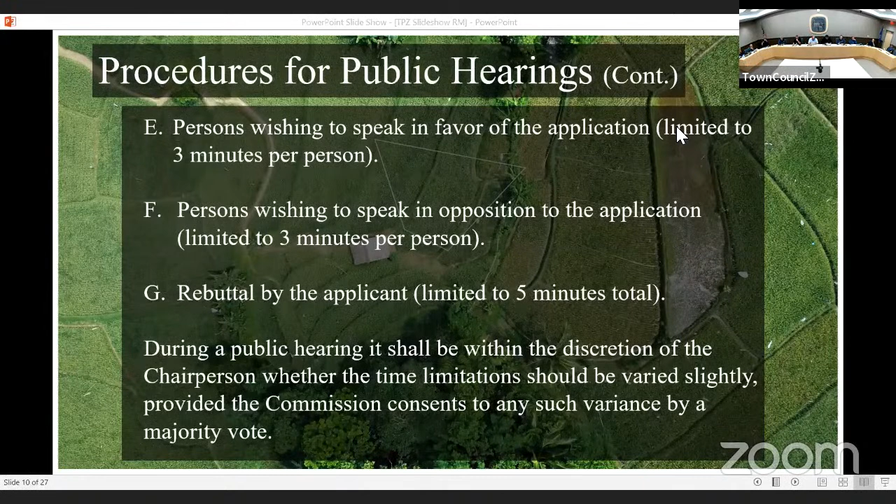Okay, thank you very much. Commissioners, I'd entertain somebody to close this petition 24-22 and move it to old business. So moved. Motion made by Commissioner Havens. Do I have a second? Second, seconded by Commissioner Haggerty. Any comments? Any discussion? All those in favor? Aye. Opposed? Motion carries unanimously to close petition 24-22 and move to old business.

Commissioner Lenars, could you read our next petition, petition 28-22, please? Petition 28-22, special permit, section 3.23.1B, an accessory outside use to allow a tent event for fireworks sales at 95 Fenn Road. Applicant Keystone Novelty Distributors LLC, owner 95 Fenn Road LLC, contact Alex Mutzabaugh, continued from June 8th, 2022.

Once again, we had most of the presentation last meeting. Everything was pretty straightforward on this. I don't think there's anything new. The abutters have been notified and the applicant has satisfied our comments. There were some comments that at the time were outstanding with regards to revising plans to show certain distances around the tent. We also recommended certain conditions with regards to placement of the tent and a 20-foot radius around it. And then there was a comment that needed to be addressed by the fire marshal with regards to distance to the generator.

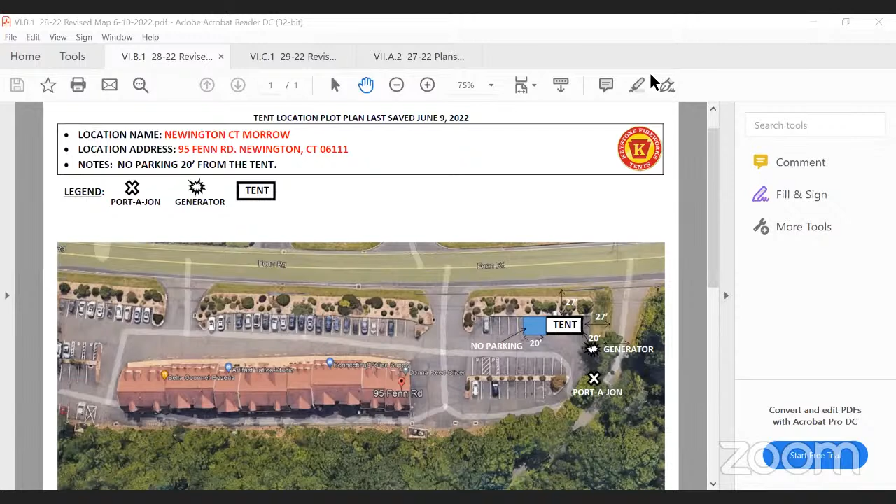Just thought I'd double check with you to see if you want to add anything, or are you all set? No, I think we're good. It's pretty straightforward. We updated the map, like Renata had mentioned, and I believe that everything is in compliance. We just need to have our inspection done once the tent and all the product is displayed, and then we should be good to go.

Okay, very good. At this time, we'll open it up to the public. Is there anybody either here or online wishing to speak in favor of this application? No one has their hand raised, Mr. Chairman. Anybody wishing to speak in favor? Anybody wishing to speak in opposition? Anybody wishing to speak in opposition, please come forward.

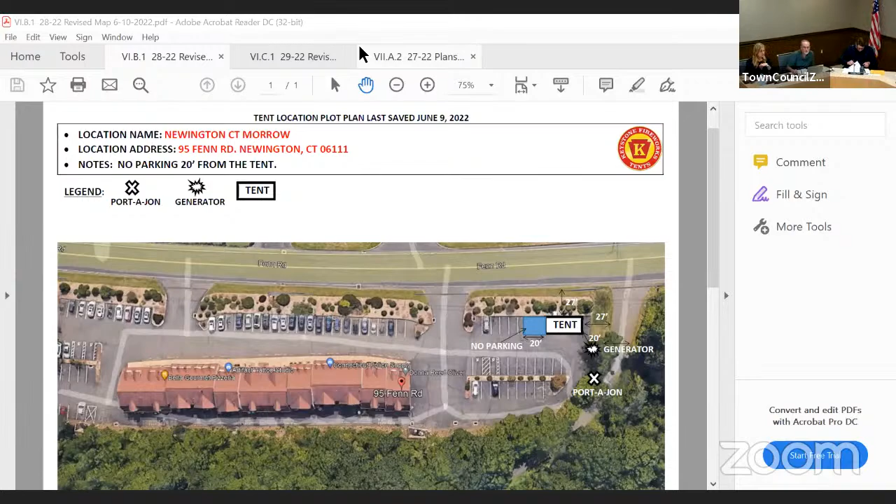Hearing none, without any objection, I'll ask for a motion to close and move to old business. So moved, Mr. Chairman. Motion made by Commissioner Woods to close and move to old business. Do I have a second? Second, seconded by Commissioner Havens. Any discussion? All those in favor? Aye. Opposed? Motion carries unanimously to move to old business.

Next public hearing on a petition is petition 29-22. If Commissioner Drodes could read that for us, I'd appreciate it. Petition 29-22, special permit, section 3.23.1.b, an accessory outside use to allow a tent event for fireworks sales at 205 Kelsey Street. Applicant Keystone Novelty Distributors LLC, owner Reno Properties II LLC, contact Alan Mutzabaugh, continued from June 8th, 2022.

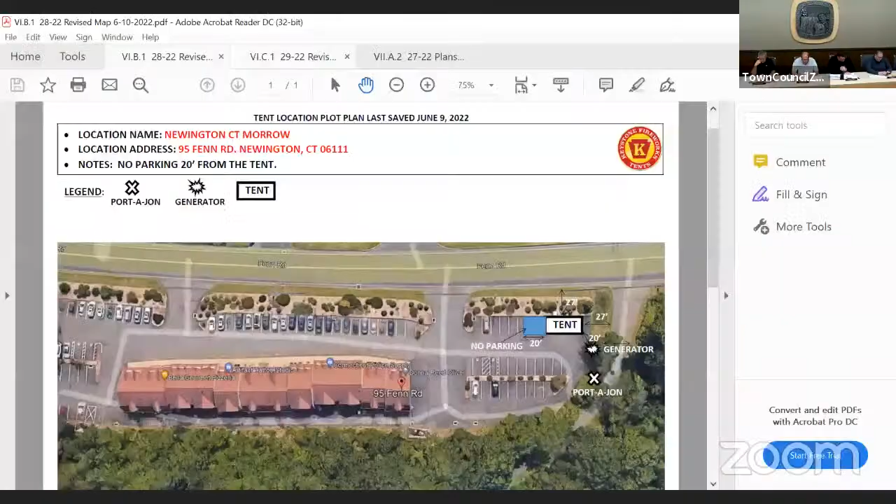Thank you very much, Commissioner. Same thing here, abutters have been notified. Renata, have they complied with everything on this location for you? Yes, this is the same situation as the previous application. The applicant complied, provided revised plans. On revised plans, they have addressed all of the staff comments to our satisfaction, and we recommend approval. Very good, any questions from the commissioners?

We'll go straight to the public. Anybody wishing to speak in favor of this application, please come forward. Anybody wishing to speak in favor of this application?

No one in the room has their hand raised. Anybody wishing to speak in opposition? Please come forward.

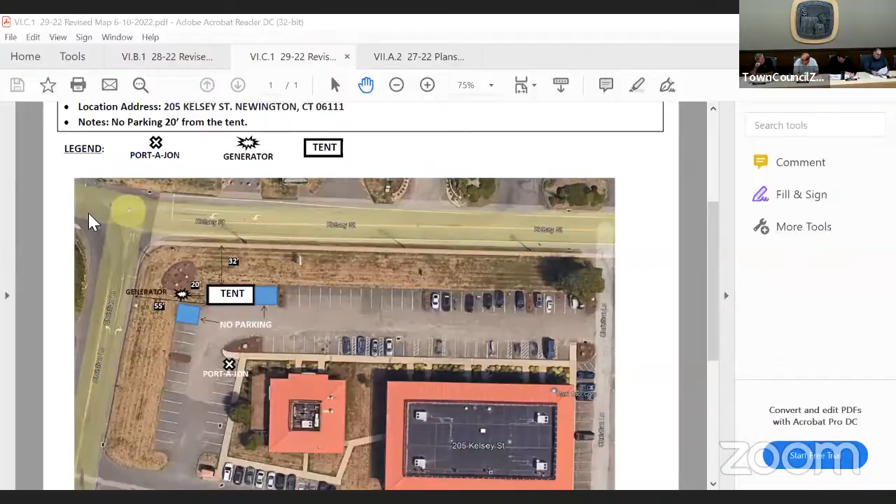Hearing none, I'll entertain a motion to close petition 29-22 and move to old business. So moved, motion made by Commissioner Havens. Do I have a second? Second, seconded by Commissioner Haggerty. Any discussion? All those in favor? Aye. Anyone opposed? Motion carries unanimously.

Okay, we're in new business. We have petition 27-22, site plan modifications of the existing parking lot, loading docks and lighting at 65 Homes Road, applicant BL Companies Incorporated, owner 65 Homes Investment Partners LLC, contact Kevin Hickson.

Is the applicant here? I know, this is interesting. You have to somehow use this microphone. Yes, I put the stand behind the table there because the camera's going to track over there.

My name is Kevin Hickson, Senior Project Manager at BL Companies, located at 355 Research Parkway, Meriden, Connecticut.

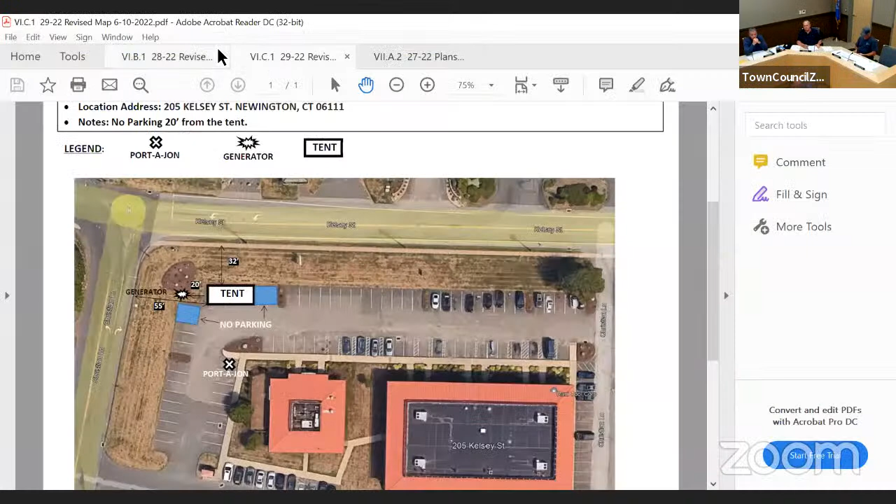This is a site parking lot modification with a 117,270 square foot warehouse building. It's actually two tenants that are in there, one being Amazon, the other used to be the Sears scratch and dent. Now I think it's the Sears generic scratch and dent tenant. It's a 9.04 acre parcel.

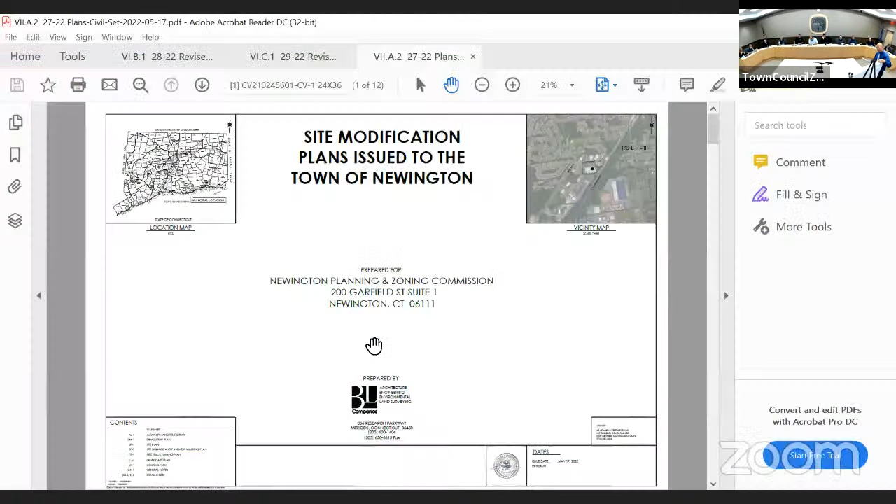We added, with the revised plan set that we sent to the town last week, a ramp and stairs. With your permission, I think we're going to display plans online, since the public needs to see what you're showing, and I think the commission has a hard time seeing at this distance.

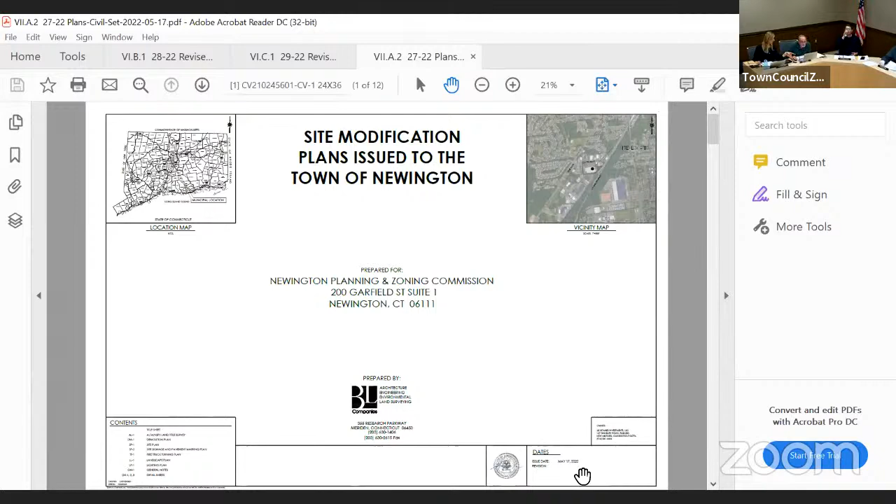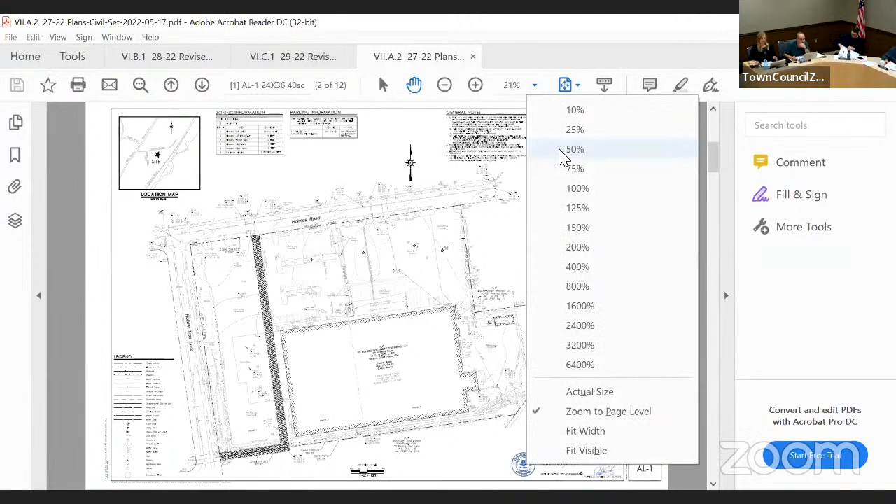The one question for you is which plans? These are not the revised ones, these are the ones dated May 17th. So we're showing the May 17th plan. You are showing the revised set of plans, right? Yes. So as we are displaying the sheet, if you want to just point out the things that are different, because the things on screen will be different than what you are showing. Correct. So if you want to go to the site plan.

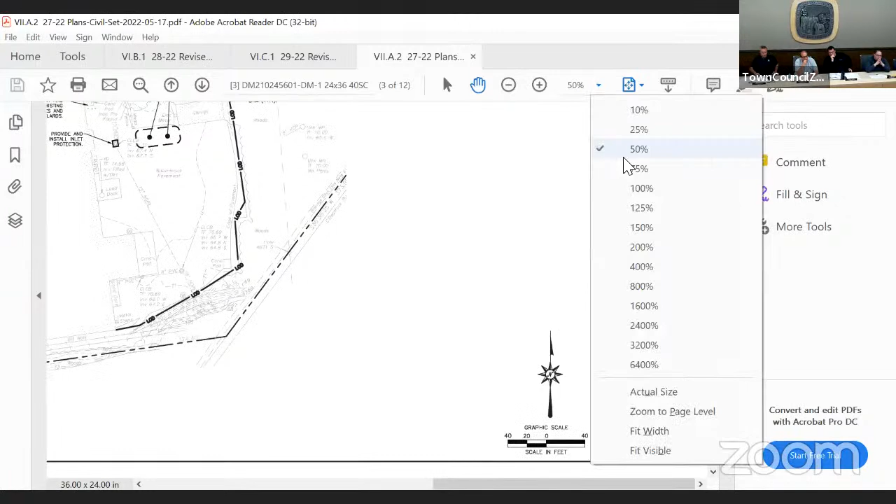Oh, this is a survey. The survey we did, I don't know if you want me to talk about it, updated the building square footage. It was 127,447, and we updated that to 117,227 square feet. There was a 10,000 square foot addition on the west end that was removed, and that just reduced the square footage overall.

On the site plan you see there, on the east side, which is on the right side, there will be associate parking spaces. The entrance to the building, to the Amazon facility, will be on the east side. The difference on the revised plans is that we've added an ADA switchback ramp that gets you up to that level, in addition to the stairs. The handicap spaces remain the same as provided.

The difference on the north side between this plan and the updated plan is the addition of concrete, heavy duty concrete pavement that would occupy the 15 loading dock doors. Then there's a rectangle just north of the loading docks heading, that's a post indicator valve. I was in contact with the deputy fire marshal, still want to get final confirmation from the fire marshal that we can remove them. Basically, they're post indicator valves for 2 fire lines that service both tenants of the building right now. So that's it with the site.

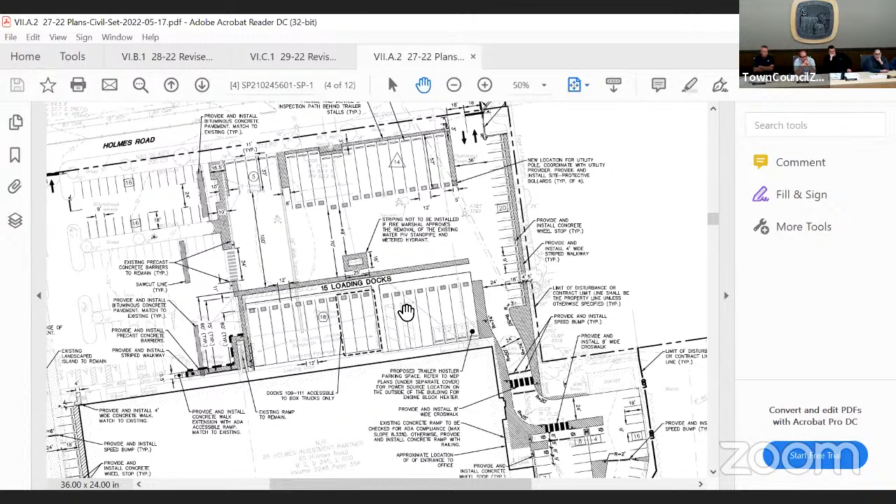I'll get final confirmation from the fire marshal. So would they still act as a shutoff? Yeah, they would. So wouldn't you still want to protect them? They're at grade instead of being up above, because they're about 3.5 feet above, and that's why they have the bollards around it. But the switch would be to a valve box that's flush with grade, like a typical one.

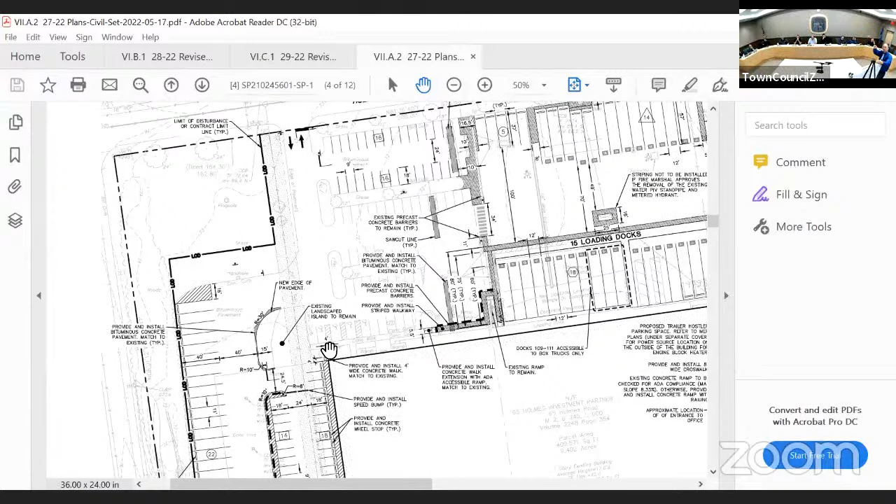On the west side of the building, there is some additional parking we're providing for regular parking spaces, and west of that area there will be box truck parking spaces located over there. Access from that parking space to the north side of the building, we've added a sidewalk, an existing sidewalk plus a proposed sidewalk. There's another entrance that's there right now, which will be a secondary entrance to the building on the north side. You can see the hand right there as you make your way east. There's a switchback ramp that gets you up to that 4-foot level.

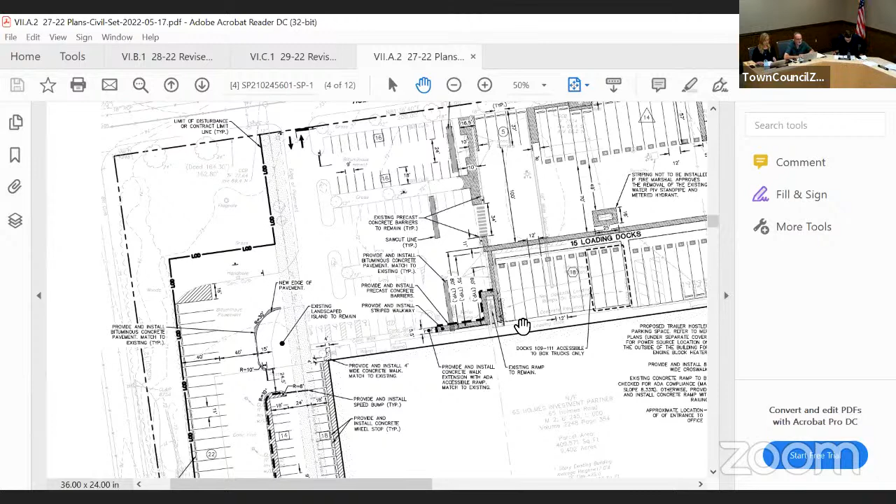Does the staff have anything to add, or have they complied with everything needed? Yes, we have one comment, which is a condition to be placed on the approval, because they're required to keep screening for loading dock doors, and there is currently screening existing on site. We will recommend certain language to ensure that screening remains. For screening the loading docks?

Yes. How are they screened now? We have a zoning regulation that requires the commission to review and approve any loading dock doors facing a public street to be screened. They currently have trees, about 10 trees that line up Holmes Road that screen these new loading dock doors they're proposing. It's going to be important going forward that they maintain that screening.

Okay, very good. Commissioner Claffey, did you have a question? I know this building pretty well, so the screening is at Holmes Road? Yes, the existing trees you see here go across the whole thing. So are we going to ask them to add more to a building that already has screening completely across the front of it on the street?

No, there is already screening, and I think we should just include language that they have to maintain that screening, but not add any more to it. They have to maintain the existing screening. We are adding actually 3 honey locust trees on there. I'm looking at that, we're not imposing to add more for a building that already exists, you're not adding any bigger building, you're just cutting 8 doors in. That's why I want to make sure we're not imposing more. They're proposing it, we did not really ask for new trees, and I don't think that we should.

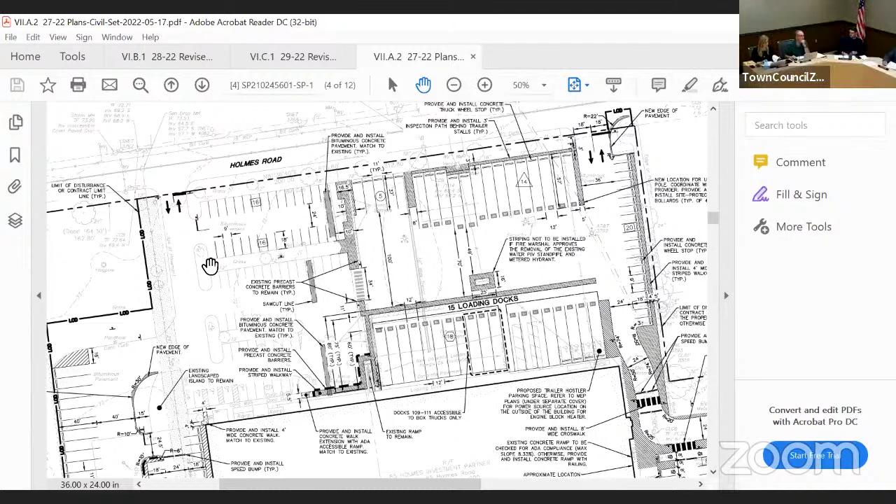Gotcha, I think it's just important to make sure these trees don't get neglected. Okay, very good. Any other comments from the commissioners? No other questions? Thank you very much.

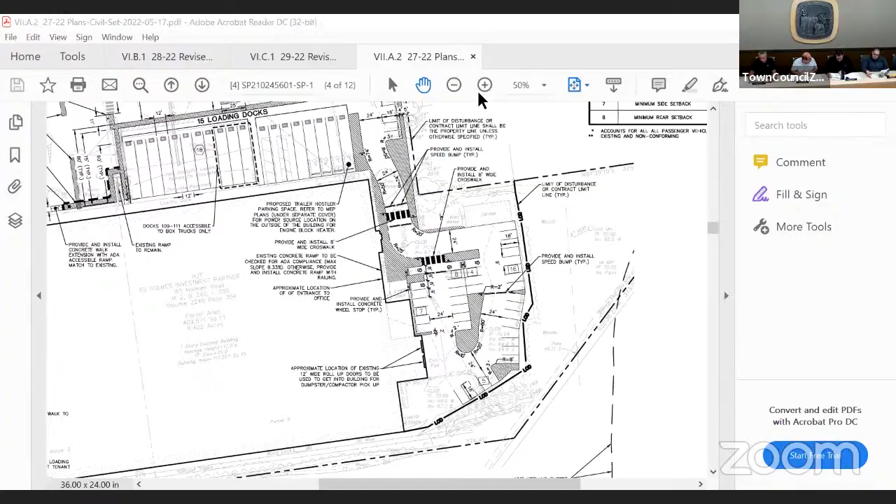Entertain a motion, well, it's already on old business. We have to move, I entertain a motion to move it to old business, Mr. Chairman. Motion made by Commissioner Woods. Do I have a second? Second by Commissioner Claffey to move this petition 27 to 22 to old business for action tonight. Any discussion? All those in favor? Aye. Opposed? Motion carries unanimously.

Next thing on the agenda is petition 30-22. Commissioner Woods, if you could read that for me, I appreciate it. Site plan modification to modify the access from Hartford Avenue at 4 Hartford Avenue. Applicant Diyala LLC, owner Diyala LLC, contact J.Y. Shallow. Is the applicant here?

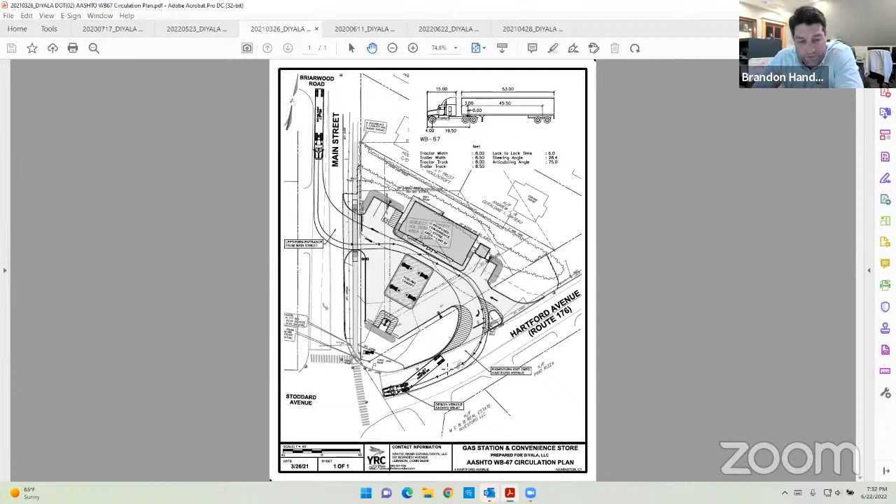So that is the reason the site plan changed in terms of the geometry of that exit lane. All of the changes were within the state's right of way, so no changes to parking or to the internal configuration of the site. I think you can see, comparing the 2020 plan and the 2022 plan, that nothing changes except for that exit lane.

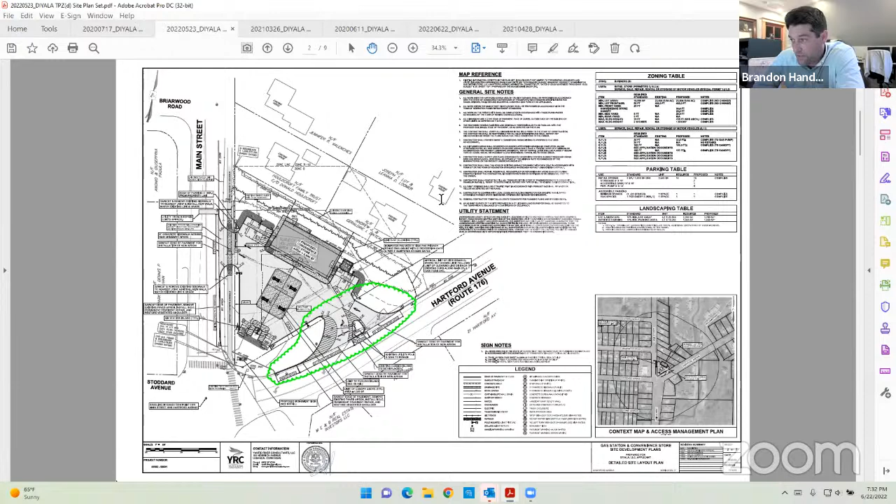Sorry, switching pages here—there we go. So that's the long story short. Happy to answer any questions you may have, but again, it's a minor change related to the DOT's comments, and they were satisfied in April of 2021 with this plan.

Very good, thank you very much. You're welcome. Any questions from the commissioners?

Any questions? Renata, anything else you'd like to add? Eric will comment on this.

This is basically driven by DOT and their purview over the state road, and the changes are minor in nature and really don't affect the on-site. It's really just the access to and from the site. I see no reason why it shouldn't be approved.

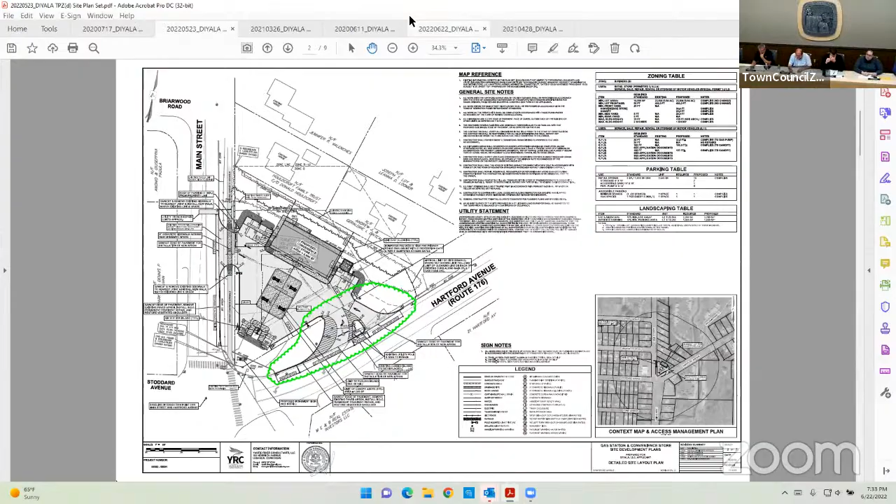Very good, thank you Eric. I'll entertain a motion to move petition 30-22 to old business. So moved, motion made by Commissioner Havens. Second by Commissioner Claffey. Any discussion? All those in favor? Aye. Opposed? Motion carries unanimously.

Our next petition is petition 33-22, special permit, section 5.3.9, site plan modifications to replace the excess parking areas with landscaping, to relocate dumpster locations and other appurtenances, and to modify the site circulation at 96 to 100 Payne Road, previously approved as a residential portion of 3333 Berlin Turnpike.

Applicant HJG-PC Newington Investor LLC, owner the Rocky River Realty Company. Contact Jamie Anderson.

Jeff Dugan with BL Companies, and with me tonight.

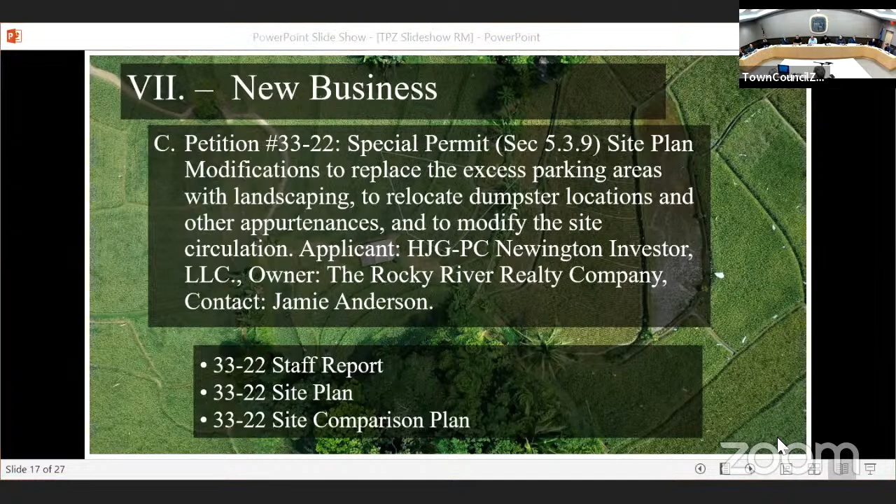We required, I believe, like 2 parking spaces for each apartment. We have since revised our parking requirements to be much lower, and it's in compliance with state statutes, and also it's much closer to what their actual needs are. So with that in mind.

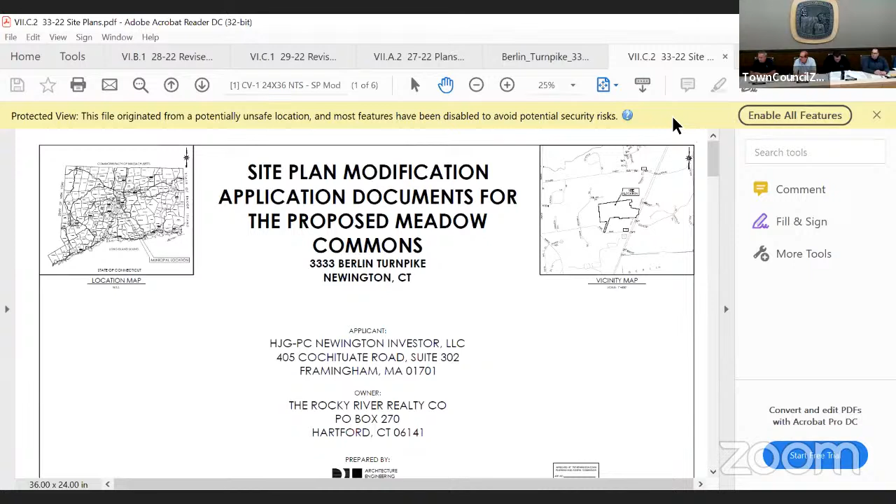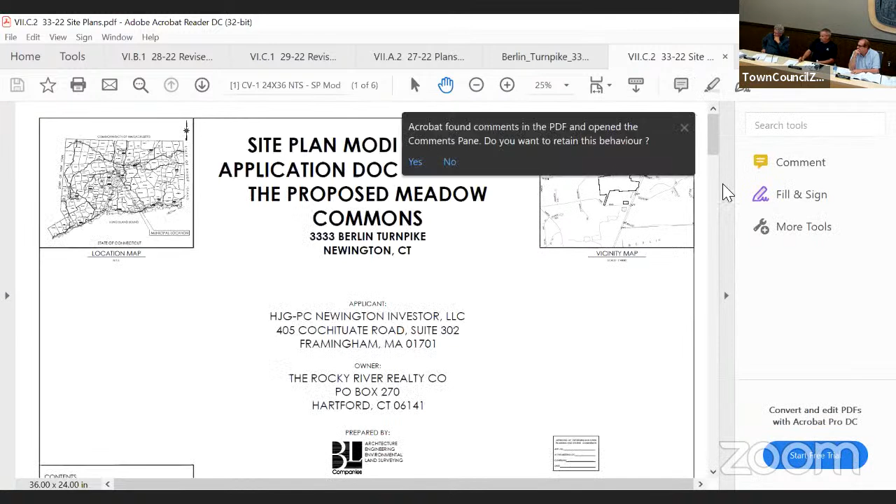Do we figure 1.6? Is that correct, or what does the state use? No, it is one space. Our regulations right now require 1 space for any 1-bedroom apartment and 2 spaces for 2 or any more than 2-bedroom units.

And you feel confident from managing your previous complexes with the proposed ratio? I have the plans that I can work with you on the proposed parking count, correct? Absolutely. If you have it up, I can certainly share the presentation, set that up. That's right, we can work without it.

I don't know why it's not working, but... Okay, it says I'm connected, but there's no internet.

That's okay, we all have plans here. I think we can manage.

Let me walk you through real quick. There's a parking table that we provided, and we'll circulate it. Do you want me to put up the comparison plan? I'll work with this.

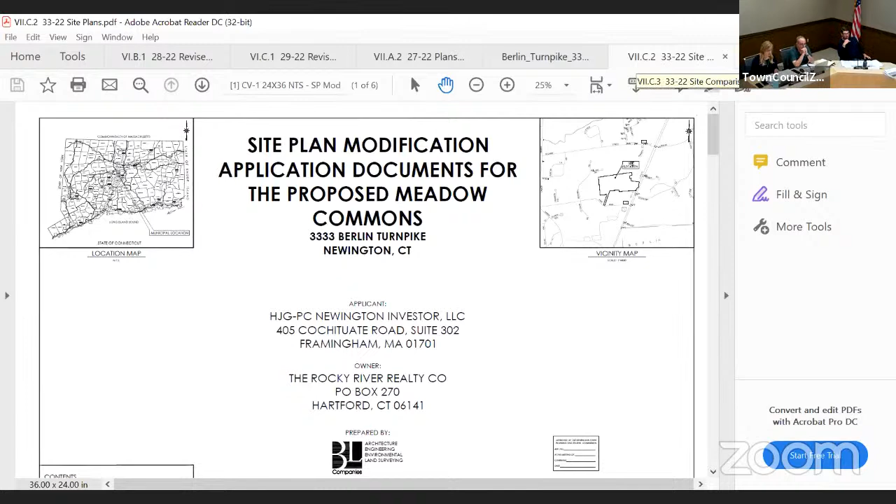That'd be fabulous. We can start there, but just to circle back to the parking question, which is really the relevant one you had asked - do we feel comfortable? Absolutely. Based on our experience, 1.5 in some urban environments we go down all the way to 0.75, but at 1.5 we have room for visitors, for staff.

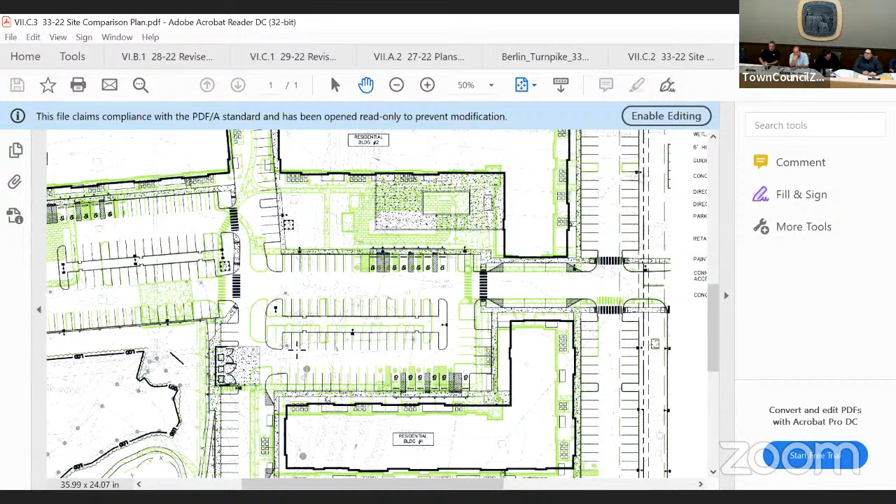And not to mention, there's a plethora of parking all around in the commercial space. Not that we feel we need it, but we didn't want to be overparked. Really the goal was to create that intimate experience. On the site plans, once we get to it, we tried to create ground floor units in some of those landscaped areas we were able to gain around the building - garden terrace patios. So if you wanted a patio space, you have an enclosed space you can sit outside and enjoy.

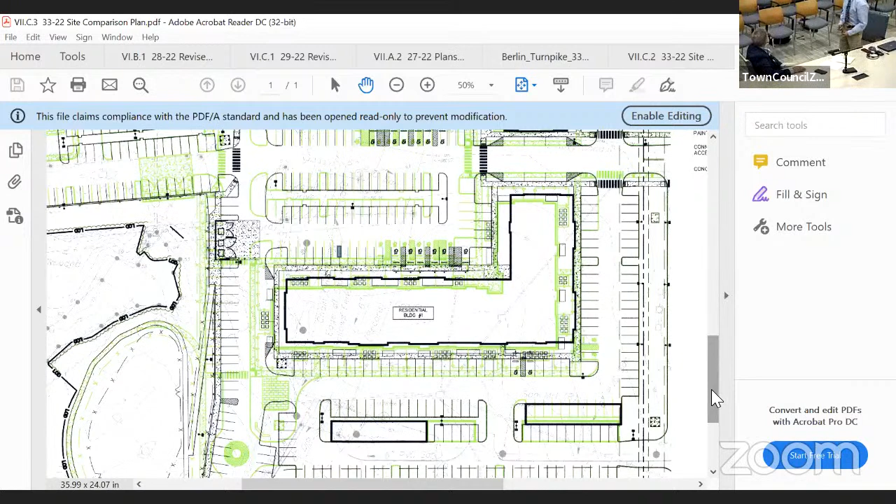So basically what we did - you can see here, and I apologize for the light green, it's kind of hard to see - the light green represents what we're proposing as part of our changes to the project. The dark black is what is approved and filed in the town land records.

Right where we're at - thank you so much, Eric, for running this for me. As you can see in the dark black, between the two residential buildings 1 and 2, before there was an access drive through there and parking, and we've been able to make that a green space and add a sidewalk. Just to the right of that, you can see we expanded the pool deck in light green compared to what was there before, and added a couple of outbuildings for the pool.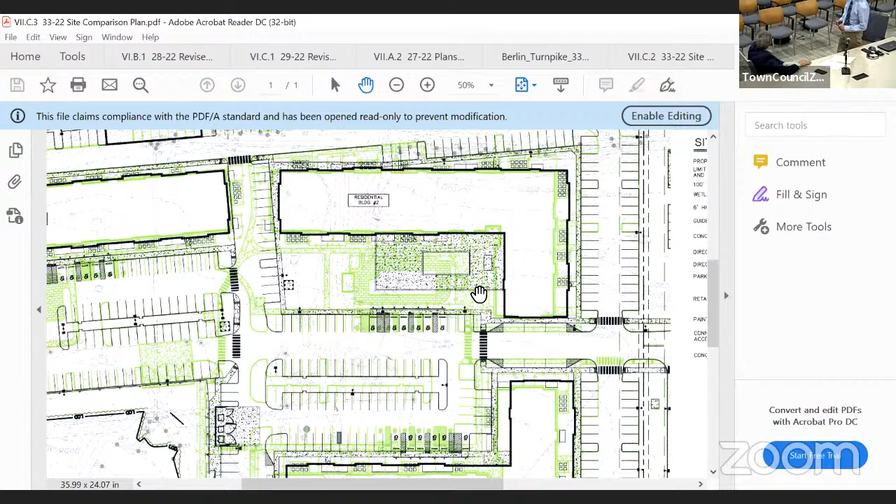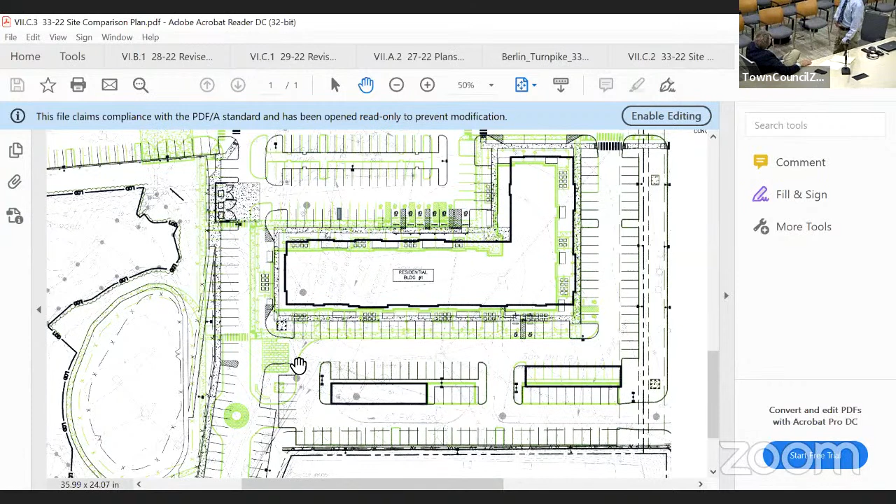Working our way down, south of the site, we slid building number 1 down and to the left a little bit, so we were able to add a little more green space around the building. To the left, we took out some of the parking - it's really hard to see, but you can kind of see the edge of pavement lines here and here. We took the parking out and added more green space there. As far as the garages, they stayed essentially the same.

Working our way farther south down the page, you can see there's the parking that we removed, with additional green space to increase the residential experience, as Eric was saying. Right here you can see the green circle in the middle.

So basically it's not a roundabout - it kind of looks like one - but it'll just be a ground feature with cobblestones or painted, or what have you. What we're trying to attain here is a traffic calming situation where you drive in, and everybody's been through a roundabout before so they know to slow down a bit to understand how to get around it. That's what we're trying to induce here - as you're pulling into the residential site, to slow down and start paying attention to what's going on around you.

And there'll still be a gateway sign there? Yeah, absolutely - it's hard to read, but yes, there will be a gateway sign right here at the proposed island location.

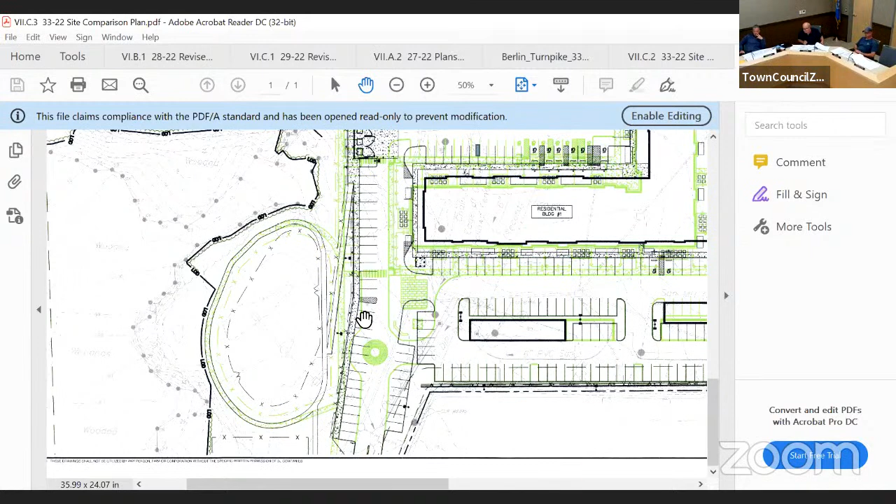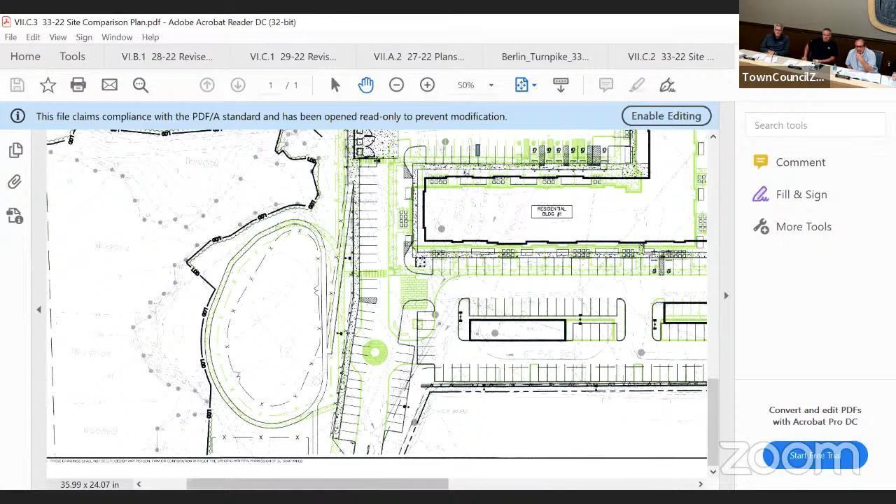And then you can see from the previous design, there was double-ended parking to the south of this building, depicted here as building 1. Basically what we've shown is the curb line extended to where the limit of those parking spaces was. We were able to pull the landscape and the sidewalk away from the building, put it all the way at the curb line, and create a bunch of green space that we were able to utilize as space for condensers and space for patio units on the ground floor.

So the other thing that's important to note, I think, is we honored the limit of disturbance - we didn't make any changes to the shape or the outline of that detention basin.

All the changes were made to the east of that. We really tried to eliminate these parking spaces, create some more green space, and circulation-wise now we have a straight shot to the commercial development down in the south here.

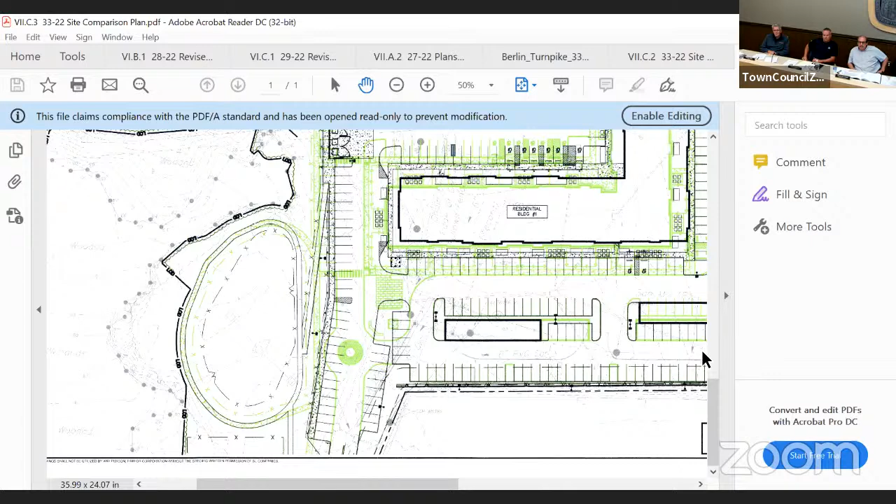There are two access points coming from the commercial through the residential. This is a secondary one, so now it flows nicely through this gateway feature.

To the north, you can see from the commercial this would be the main connectivity heading all the way to the east of the commercial, and that stayed the same for the most part. We had to make a minor adjustment to the shape of the island, the width of it, so it's consistent with the width on this one.

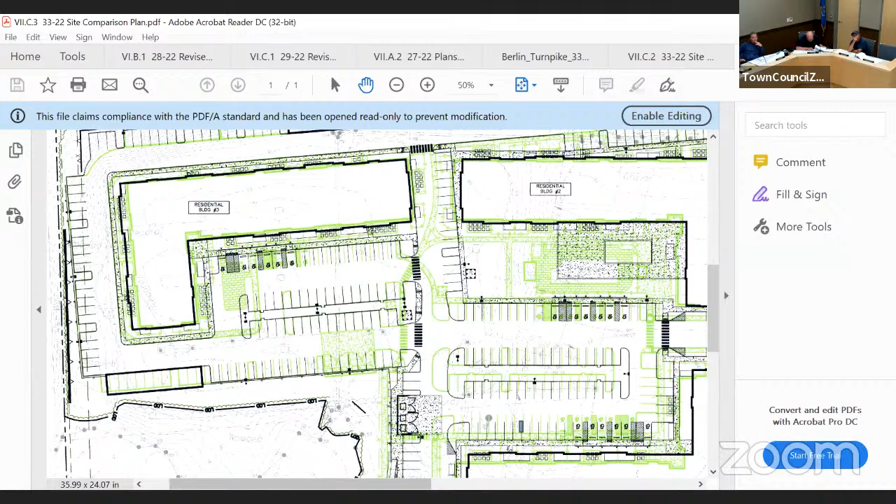We're able to shift the parking away from the building and create some more green space around the side of the building. The access between the two buildings, buildings 2 and 3 on this plan, used to be head-in parking, and it made it difficult for that connection to the amenity space.

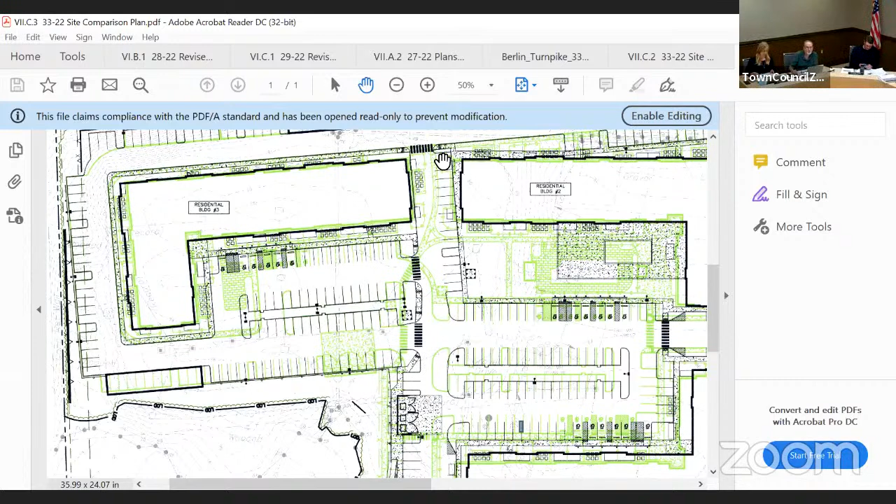I'm not sure if the other plan has the proposed landscape render drawings in there. Sure, might be easier to.

You can see some of the garden style units sprinkled around the buildings. Here's that circulation road where it used to be a road going between; it creates this connectivity between buildings 3 and building 1.

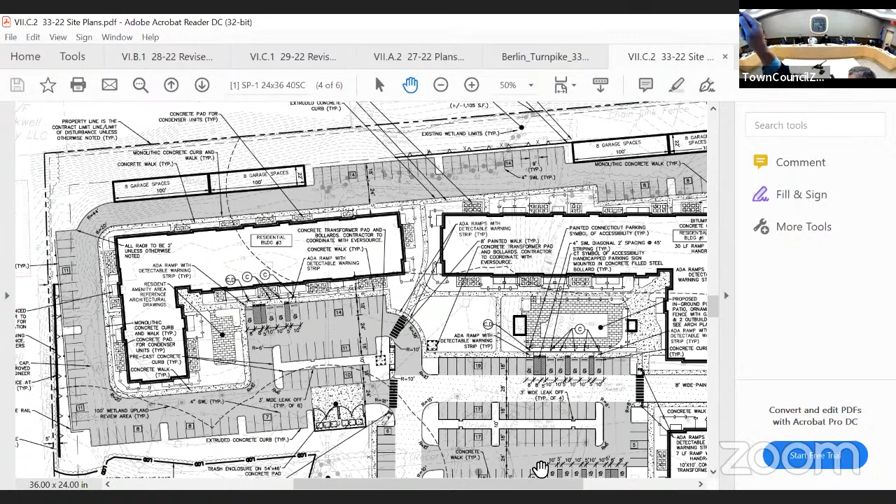There'll be a nice green space here for families or individuals to read, and it'll be another secondary amenity space for this particular building. While the main leasing office will be in this northeasternmost building, it's important for us to have a space that works for each of the buildings on their own.

So that was really the driving motivation, to minimize the amount of parking based on our needs and the town's requirements, and to really try to create a residential scale.

I think the other thing we had talked about was potentially shifting the dumpster location to there. After further discussion, and I appreciate the feedback, I think where we initially showed it was here, which allowed for better access.

Working with waste management to come up with a way of managing the trash for the residential side of the development, I think that's probably a more appropriate location, where it was initially shown and approved. But I think those are the changes, and it's unfortunate you weren't able to see the renderings.

I'll send them to Renata, and hopefully you guys can take a look at it. And if you have any questions, please feel free to reach out and ask.

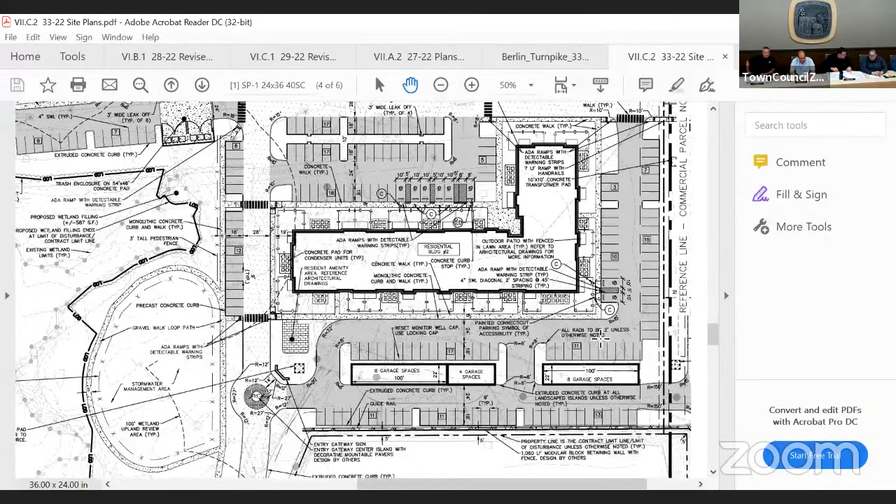We're really excited about this. We look to start construction on building 1, the northeast one, which has the leasing space and the amenity space. We're looking to break ground on the building.

It'll be pad ready by the middle of October, so a 12-month build period. By the end of next year we're hoping to have residents in building 1, with approximately a 22-month build for the entire project, and site work starting in about a month.

So I brought up the landscaping plan. I don't know if you want to discuss it, but just so they can get an idea. It's up to you. Yeah, no, thank you.

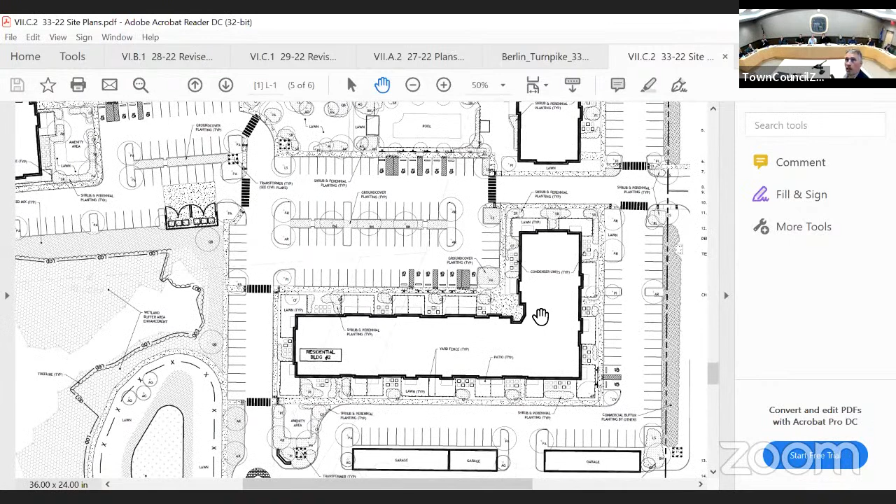You can see there's a rendered color version of this, a rendering of the patio spaces where you can see individual units, and it provides a really unique experience for people to come home after a long day of work and just sit down, relax, and enjoy the sun.

Southern exposure here, nice sunsets to the west there. It really ties the whole development together with the commercial opportunity to go get a bite to eat or go shopping at the grocery store there.

Very good, thank you very much. Any questions from the commissioners?

Renata, do you have anything else you'd like to add, or Eric? No, Chair, I would like to say that I personally like very much the changes that they proposed.

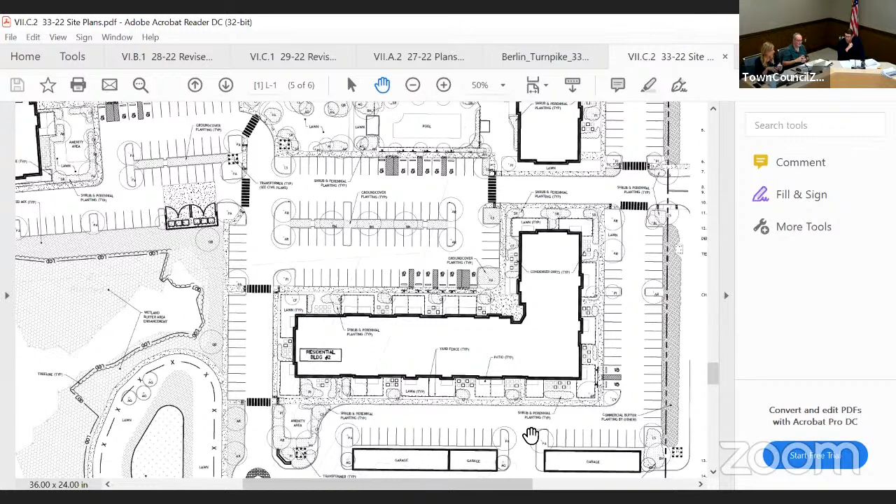We have some very minor outstanding comments. We are prepared to recommend that the Commission approve this, subject to staff modifications. The engineer has commented to add some notes.

We will need to confirm that no changes will be made to the stormwater management report, etc. Our main comment really had to do with the location of this dumpster area, which was a little bit inefficient.

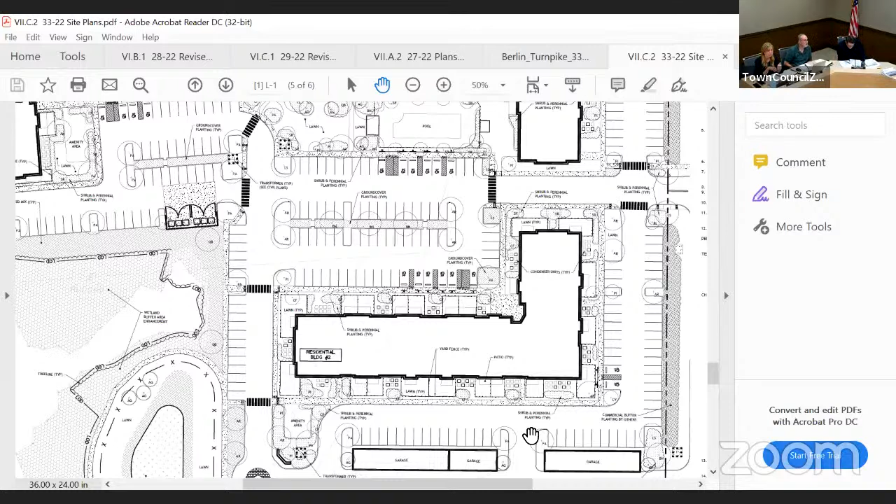Actually, the engineering probably is improved because there's less pavement area. We agree, and the engineering does agree as well. So it's just a matter of jiving what's on the plans with what's in the engineering reports. But aside from those minor comments, I think on the staff level we all like this. It's a very nice plan with some nice improvements. I like the extra green space. I think it's going to be a big benefit to the people living there, making it a nice project.

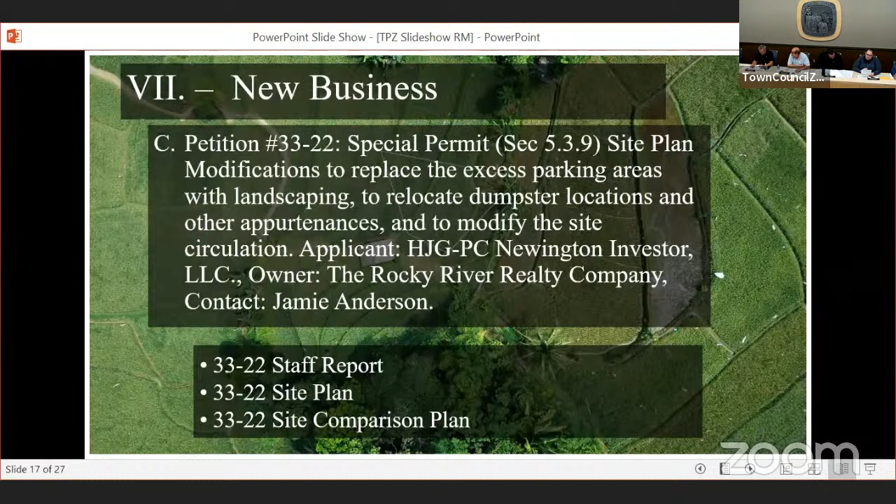I'll ask one last time if there's any other questions from the commissioners. Hearing none, without any objection, I'll entertain a motion to move petition 33-22 to old business. Motion made by Commissioner Woods. Do I have a second? Seconded by Commissioner Havens. Any discussion? All those in favor? Aye. Opposed? Motion carries to move this to old business for tonight. Thank you very much.

Okay, we're in old business now. Our first petition is petition 24-22, special permit, section 5.2.7, to modify an existing freestanding sign to allow for LED prices at 295 Main Street. Applicant Kara Kennedy, owner 295 Main Street Newington LLC, contact Kara Kennedy. I'll entertain a motion.

Move to continue the public hearing for petition... I think we closed this, this is wrong, right? If I can interject, our motion was to continue the hearing because we did not know whether we would have the information that was provided to you tonight. Considering that the applicant's representative has stated on the record that some signage will be removed, that the signage on site will not exceed what was approved, meaning 76 approved square feet, and that the dimensions of the LED signage will not exceed what's existing, I feel confident you could approve that with conditions as stated on the record. I'll give it a whack.